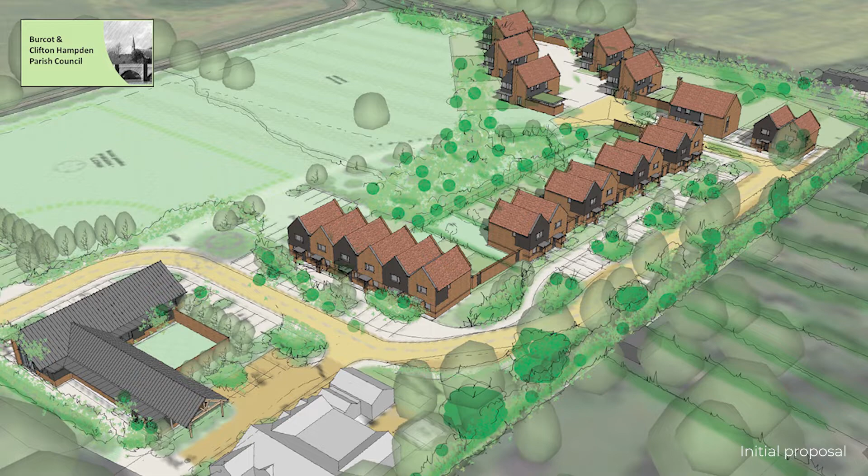Most residents were in favour of this scheme. However, concerns were raised about its impact on the openness of the green belt, the type and size of houses, and the effect on neighbouring properties.

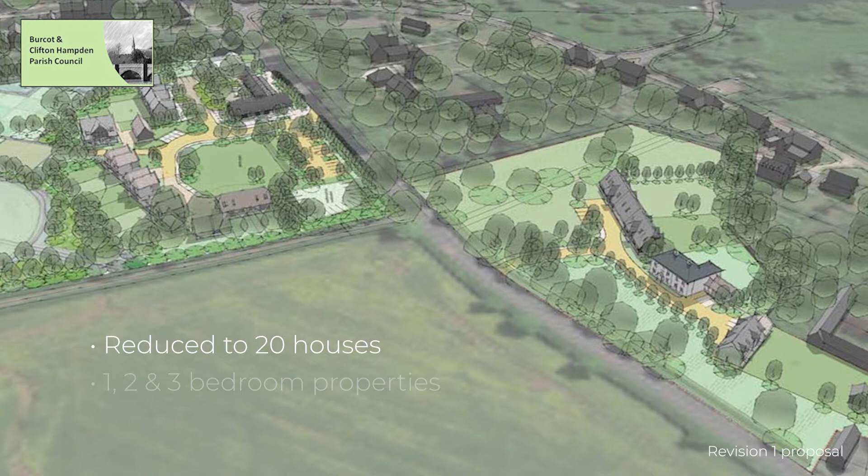In response to these concerns, the scheme was revised, reducing the overall number of houses to 20, rebalancing towards 1, 2 and 3 bedroom properties, and fundamentally changing the layout on the allotment site.

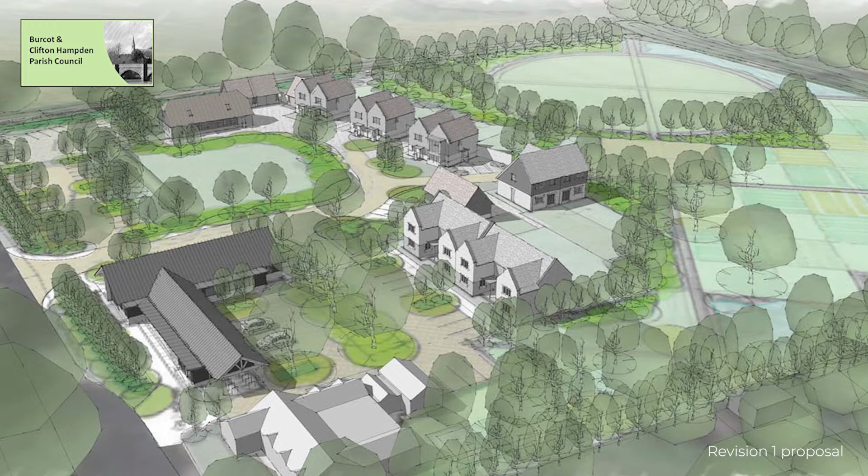Following this revision, pre-application advice was sought from South Oxfordshire District Council. Generally supportive of the scheme, they too were mindful of possible impacts on the greenbelt, specifically the amount of space being taken up for development. They also expressed concerns regarding the layout of the paddock site and its effect on the conservation area.

Following their comments, the scheme was revised again to the one now proposed. The number of houses has been further reduced to 17. The burial garden moved to the paddock, and the layout of housing on the paddock site adjusted to conform better to the conservation area.

This new Neighbourhood Development Order will deliver a new surgery building fit for the 21st century, 17 new homes, mostly 1 to 3 bedrooms, 4 of which will be designated affordable housing, i.e. housing for rent at below market value or shared ownership. An extension and improvements to the village hall, improved car parking, a new burial ground and new allotments, transfer of assets from the current owners, the Gibbs estate, into community ownership, namely the village stores and post office building, land for allotments, and about 5 acres of undeveloped land.

Access to new open spaces on land that is currently privately owned. A 10% biodiversity gain. Capital grants improvements to the school and recreation ground. Retained rights for villagers to make use of the Barley Mow car park. Land for a new footpath and cycle path to Long Wittenham.

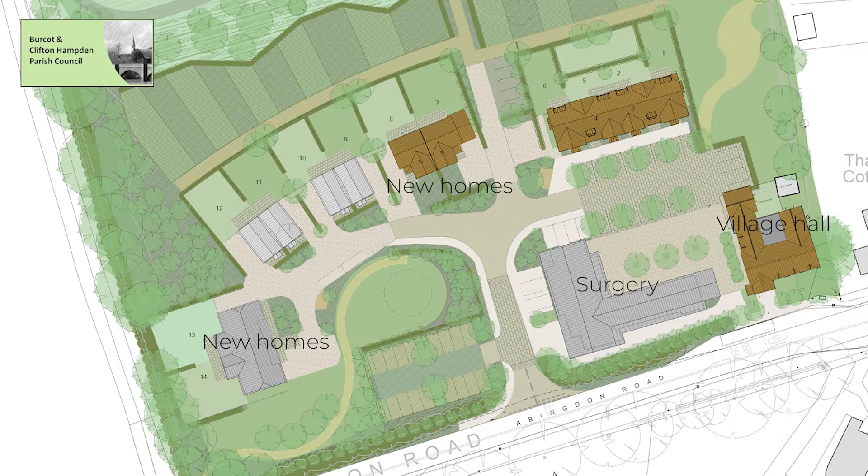The allotment site will comprise a new surgery, along with a new extension to the village hall, and 14 new homes, mainly 1 and 2 bedrooms, including single-storey maisonettes and bungalows, all arranged around 2 distinctive public spaces.

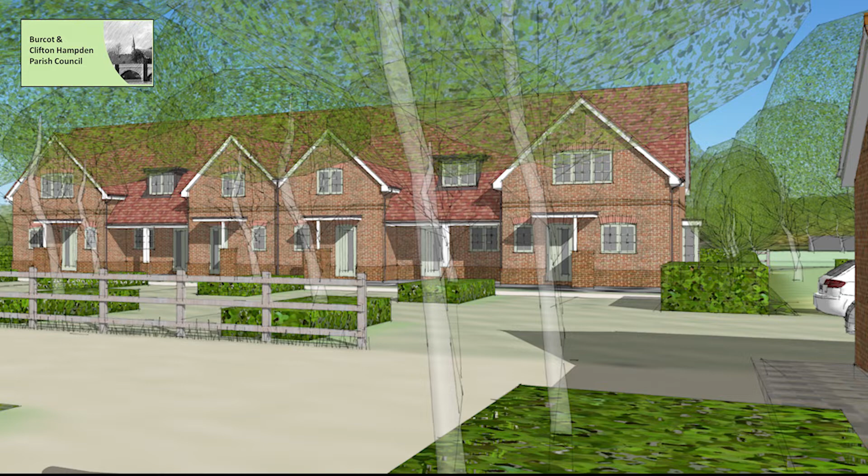A small public square is proposed, overlooked by a short terrace of 6 homes, the extended village hall and the new surgery. The partly paved and gravelled square will be shaded by tall, growing trees, with parking restricted to maintain an attractive social space immediately outside the new entrance to the village hall.

Whilst the extended surgery roof offers both shelter and secure cycle storage at the bus stop, along with ample scope for bench seating in this area.

A new main access is proposed off Abingdon Road just before the bus stop and offers good visibility in both directions and an appropriate location for the surgery entrance off the highway.

Discreet landscaped parking is provided opposite the new surgery, screened by mature hedgerows and new tree planting, and additional disabled spaces and covered cycle storage is provided at the entrance itself.

New homes are set around a small green, which is edged with trees and a strong planted border, screening the space from the main entrance into the site.

The homes here are a mixture of 2 and 3 bedroom semi-detached properties, generously spaced to allow views and planting between. The westernmost homes are 2-bedroom bungalows also overlooking the green.

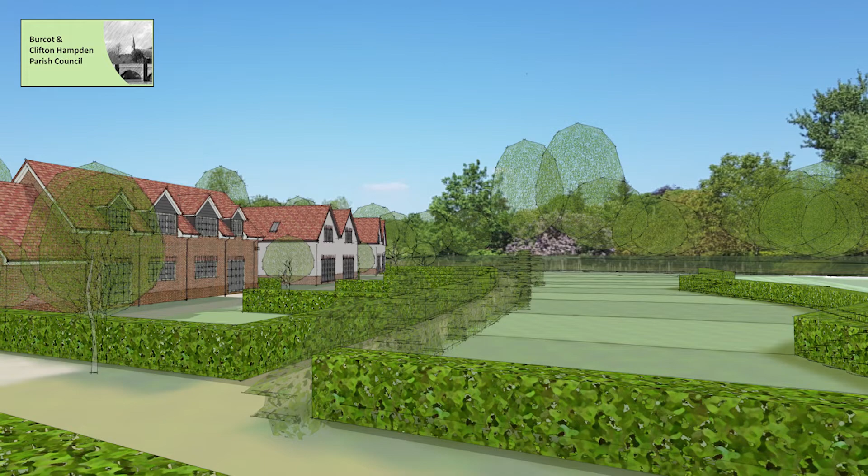To the rear of the new homes, a buffer of strip allotments is proposed, accessed from a continuous gravelled path, leading to a new community orchard to the west of the site and joining footpaths east-west across the site.

North of the allotments, the present line of walnut trees planted for the millennium are retained, with the tree line area managed as wildflower grassland, whilst the present cropped field beyond will be managed so as to increase biodiversity.

Mature hedges are retained on the western side of the meadow, with corners planted up with blocks of mixed native woodland tree species, providing additional amenity and increased habitat value.

Existing boundary rights of way are all retained, with additional mown paths around the meadow, providing greater connectivity and wider benefit, with scope for bench seating to be provided within the space.

Generally, the new dwellings adopt a rural appearance, using traditional materials of brick, timber and clay, albeit offering more modern layouts and features such as larger doors and windows for maximum natural light.

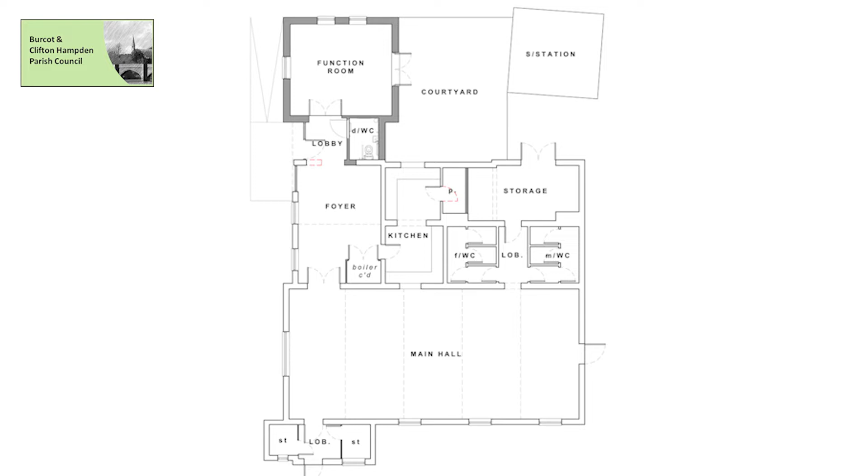The village hall will be provided with a new generous entrance with new disabled facilities and a new meeting room, leaving the existing smaller function room to be used as a generous foyer and buffet area immediately next to the kitchen.

There will be improved access from the new room to a secure courtyard, and from here users will be able to access the green space to the north of the village hall for outdoor events in the summer, whilst also making use of the public square to the front.

The surgery has been designed to accommodate the practice requirements whilst providing a sense of enclosure to the public square. A single-storey building form, clad in timber weatherboarding, sets the surgery apart from the dwellings, whilst ensuring it doesn't dominate its neighbours.

The paddock site remains a simpler proposal overall, the development of just 3 new homes, along with new public parkland that includes a new cemetery and lich gate, approached across a grassed parking area.

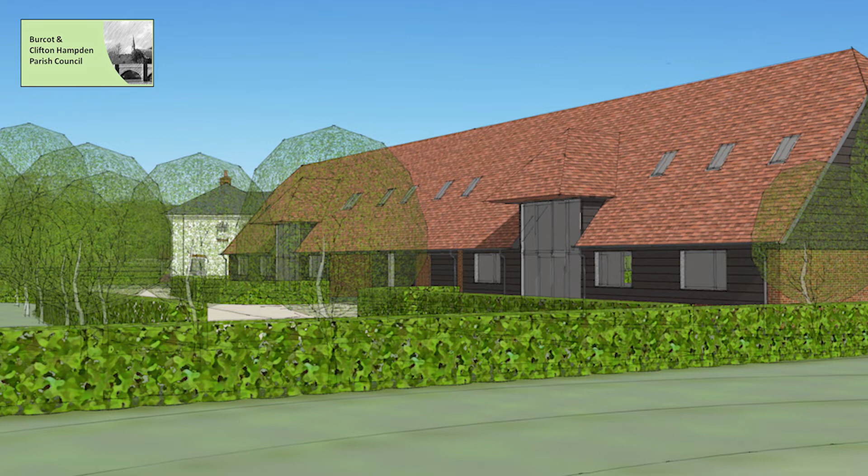Smaller numbers here allow us to treat road design in a much looser fashion, and the proposals loosely echo the organic growth of a typical farmstead. A compact arrangement of distinct building forms of farmhouse and barn, which reflect the nature of existing properties on either side of the site.

Landscaping is also less formal and evokes a rural parkland along the eastern footpath, whilst the westernmost part of the site provides a new cemetery with screened parking.

The existing frontage hedgerow is managed to provide the necessary sightlines, whilst retaining the characteristic landscaped boundary. Additional hedging stock will be planted to the rear, maintaining hedge width and density, whilst the established tree line will be extended.

Much of the site will remain as open parkland, with additional specimen trees being planted along with a community orchard over simple wildflower grassland.

Considering footpaths at an early stage ensures the sites don't become isolated from the village, but remain embedded with the pedestrian routes and paths that tie the village together as a whole.

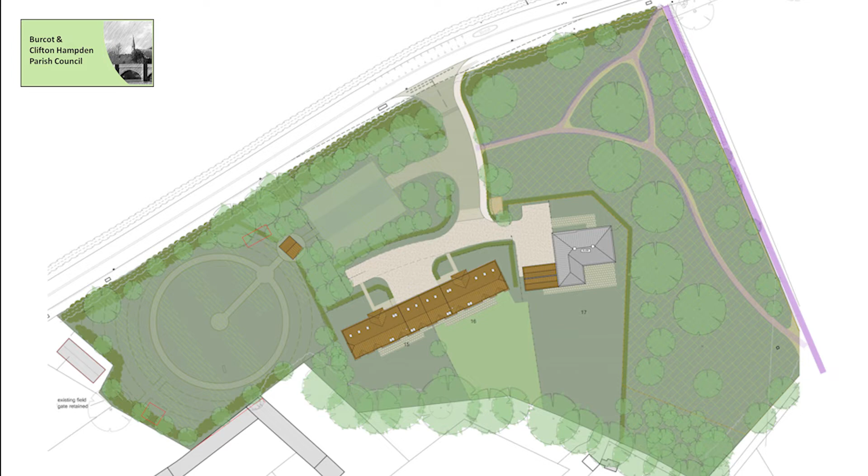To the east of the paddock site, the public footpath fence line will be completely removed, leaving the path edge open to the site, whilst additional paths through the site would link public footpaths with the burial ground to the west.

On both sites, we have sought to enhance the key qualities of their existing character to provide a high-quality landscape setting for the new homes and public amenity spaces.